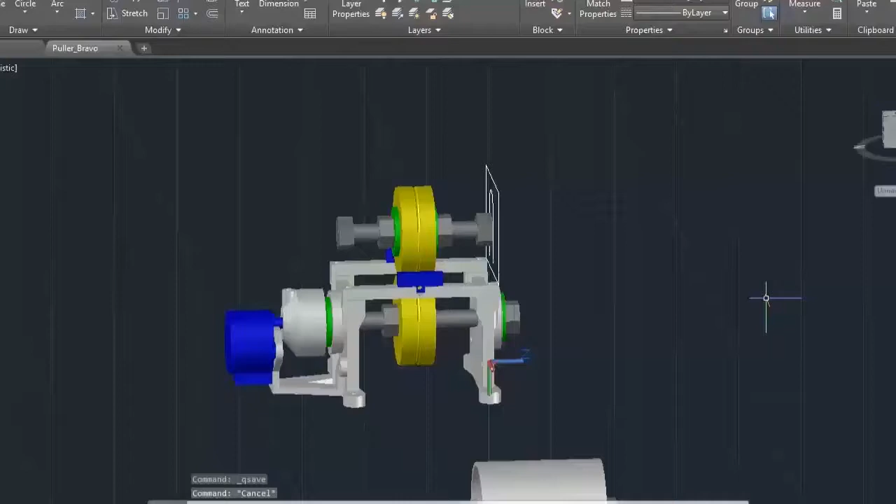Hey there, what you're seeing is me designing a Delta version. You'll see the assembly and everything in a moment.

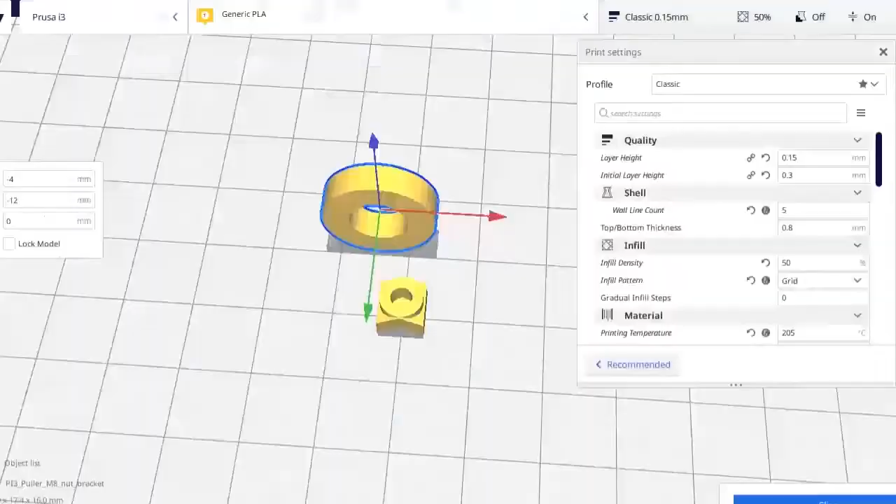If anyone was wondering, I use Alpha, Bravo, Charlie, Delta as versions. So Alpha is like A, first version, and so on. This was supposed to be a Bravo version, but I did one more edit, so it's now Delta. And I always skip Charlie just because the Slovak language takes CH at the start of Charlie as a separate character, not as C, so I go Alpha, Bravo, Delta, Echo, and so on. So yeah, let's talk about the Delta version.

So to assemble this, you need, as with the Puller Alpha, two M8 threaded rods. One is 98mm long and one is 70mm long. And also you need M3 rods. Two are 60mm long. These are necessary to tension the upper wheel of the puller. And two are optional to go to the top, as you'll see in the video. And these are 74mm long. So that's six threaded rods in total for the assembly.

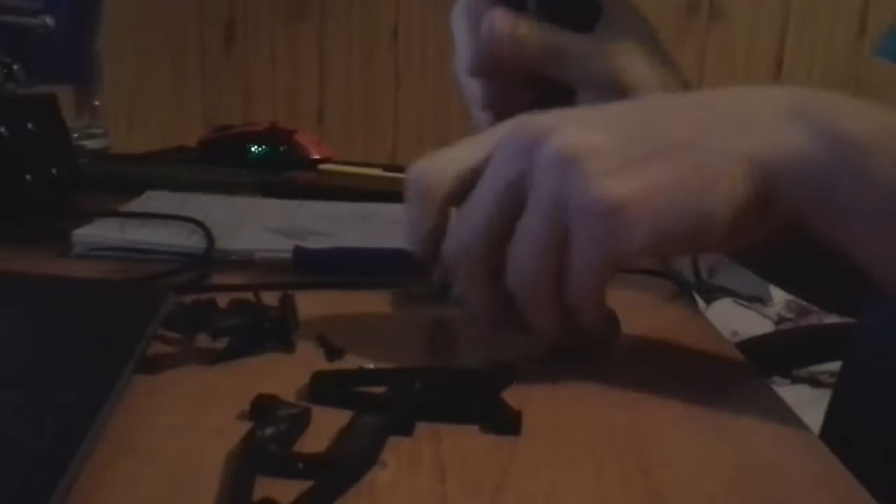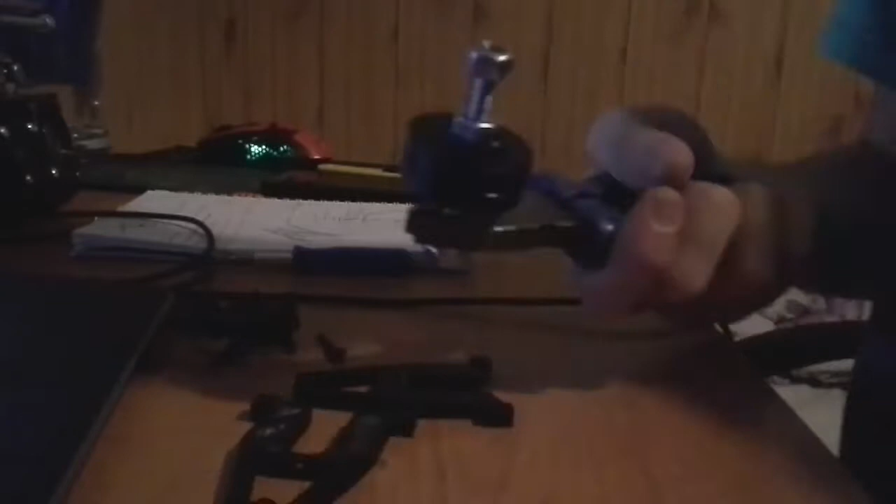I'm sorry for the quality of the videos, but I'm pretty sure that no one will be watching these videos anyways, so I guess I'll improve the quality later. But yeah, I used to record on my Xiaomi phone, which has an okay camera, but I told myself I would try and use my older phone, which doesn't have a high quality camera, but I thought it would work okay. As I see now in the video, it's not that good, so I will maybe switch back to my Xiaomi phone for the recording. That's because I don't have a camera, at least not so far. I'm not sure if I will get one, but my phone will have to do for now.

What I did so far was to insert two bearings into the bottom parts, insert the lower M8 threaded rod with the shaft coupler and the lower wheel on it. Then I inserted 4 M3 nuts into the openings in the bottom parts, and then I attached the filament guides with M3 screws. You see me use a lighter to heat up the parts a bit. That's because the parts I print with a raft are white from the bottom because of the adhesion to the raft. That's not necessary at all.

Then I disassembled the top wheel and put in the spacer I printed. On the upper M8 rod there is an M8 nut, bearing, spacer, bearing, and another M8 nut. Between the bearings, or on top of the spacer, there is the upper wheel. On the sides there are two M8 nylock nuts, which should be inserted backwards. Then we're good to insert the two shorter M3 rods.

For the upper wheel tensioning, we're using two shorter M3 rods along with 4 washers, 2 nylock nuts and 2 springs. I don't have two identical springs, but I will work with what I have. To screw the nylock nuts on the rods, I will use a male to female standoff. I hoped its hex would be the size of an M3 nut, but unfortunately that's not the case.

First we insert the M3 rod, then put a washer, spring and another washer on it. Then we put a nylock nut onto the rod and screw it on. We do the same for the other side, and the last step before mounting the upper parts onto the rest of the puller is to insert a bracket on an end of both threaded rods. This bracket prevents the upper threaded rod from slipping to either left or right.

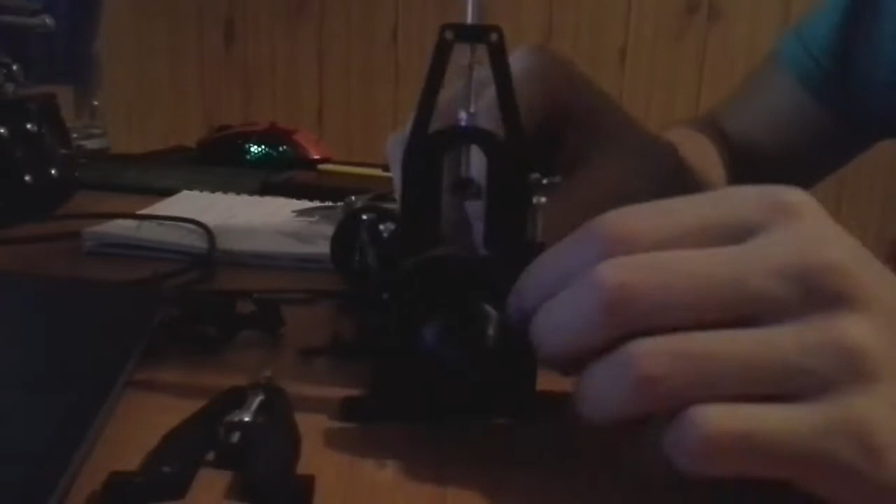I know I said earlier I will design my extruder vertically, and now you see me design a puller, but a friend suggested to me to use a horizontal setup, so I guess I will try it horizontally first. If I think later I could improve it with a vertical setup, I maybe will redesign it. I will let you know about that in a video in which I will talk about my design, which is not yet completely finished.

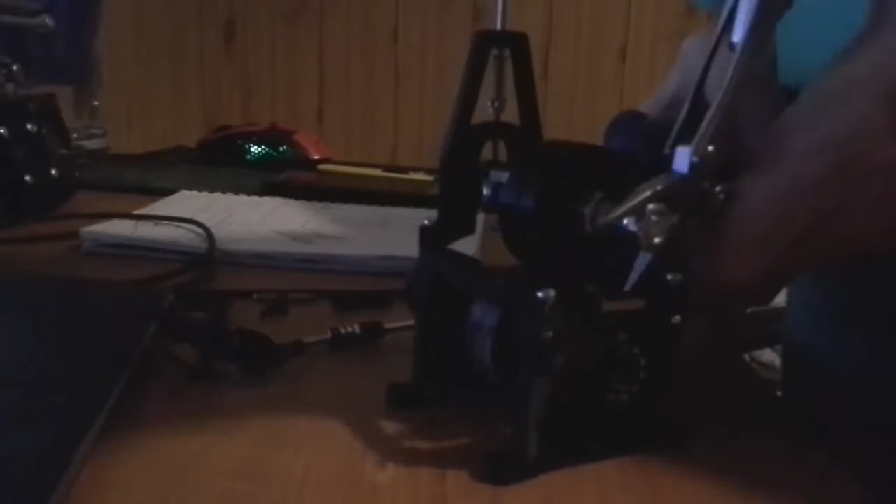You see me testing the fit of the upper wheel and the threaded rod between the upper parts, and that's because the distance between the nylock nuts on the upper M8 threaded rod needs to be exact. That's because the printed brackets on the M3 rods will hold them in place, and they can be loose or they can be too tight, so that might need some adjusting, but it takes like 3 tries to get it okay.

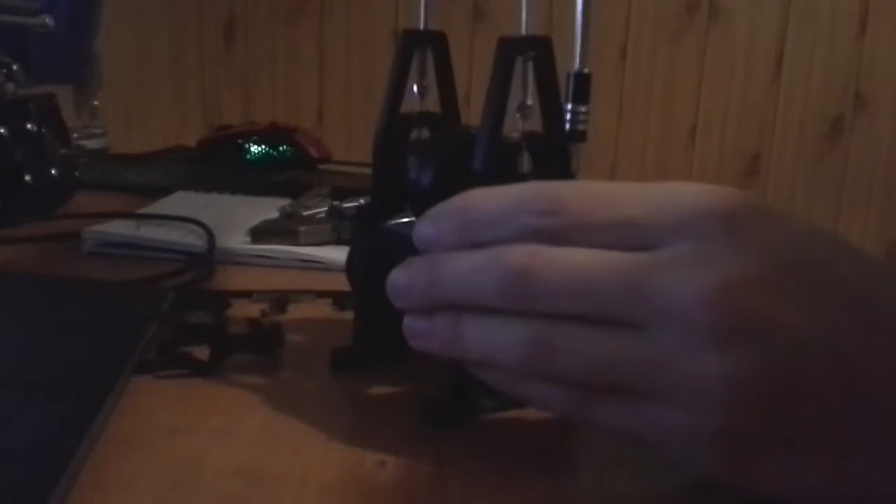And also there's a need to adjust the nylock nuts on the M3 threaded rods, because you need the right tension on the upper wheel, and since my springs are not identical, I need to adjust it so the upper wheel is level.

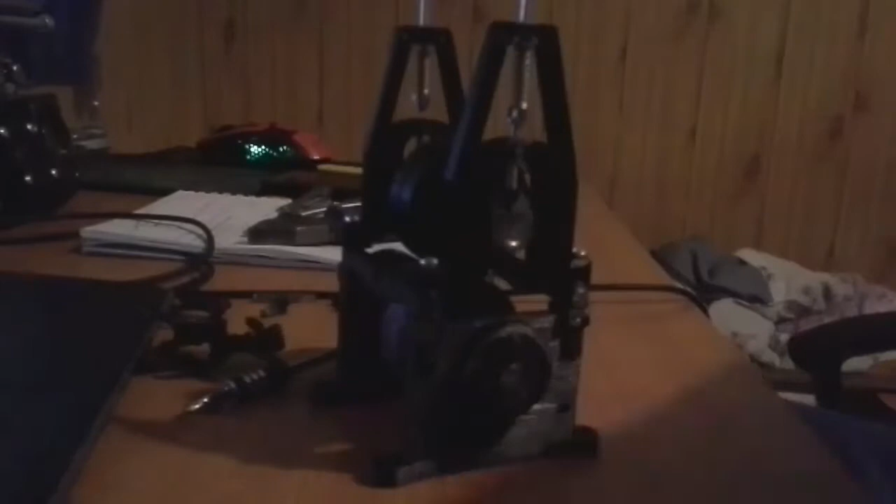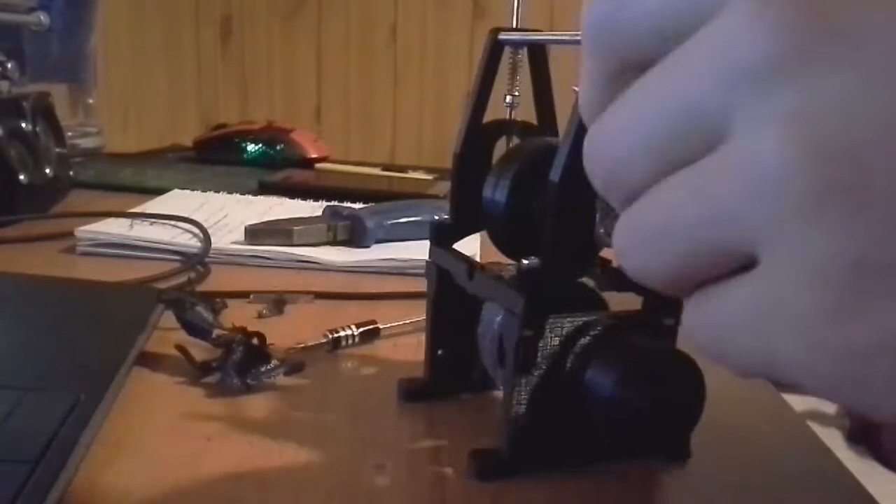This step is not that necessary, but I think it's a good thing to do. Insert the longer M3 threaded rods on top of the top part, and this is to ensure that the distance between the bottom of the top parts is the same as the distance between the top of the top parts, so it's perpendicular to the platform or whatever you're screwing the puller itself on. For that you need 4 M3 nuts on each side, so that's a total of 8 M3 nuts.

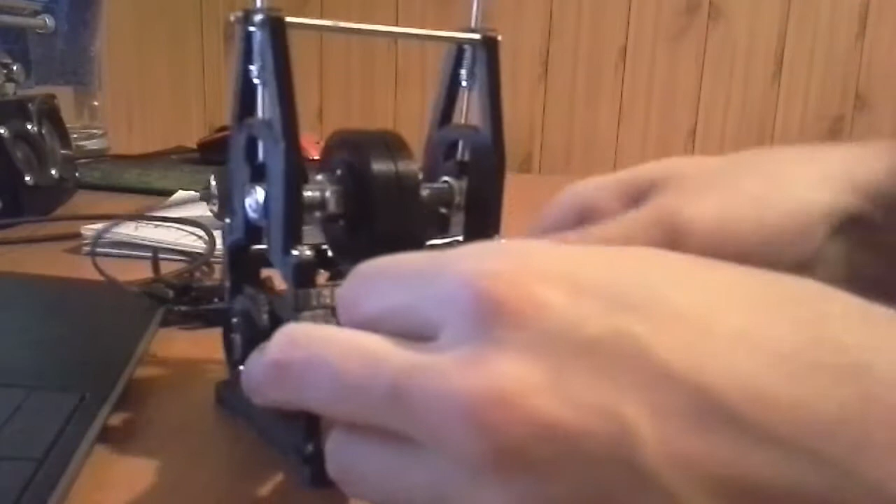You see me testing the puller with my headphones. I will test it with the real filament, but I was just curious about how well it will pull, and it works quite great, better than I expected. Although I am a little concerned about the roundness of the lower wheel, because of course I want a perfect circle. But as I put hot glue on it, it probably isn't that smooth and it's a bit uneven.

And although I tried to put more glue on it and I used a soldering iron to even it out and smoothen it a bit, I'm not sure how well it will work in practice, but hopefully it will be okay. And I will test it later with my filament extruder. Now we will try to insert M3 rods on the top, and later you'll see me use the real filament.